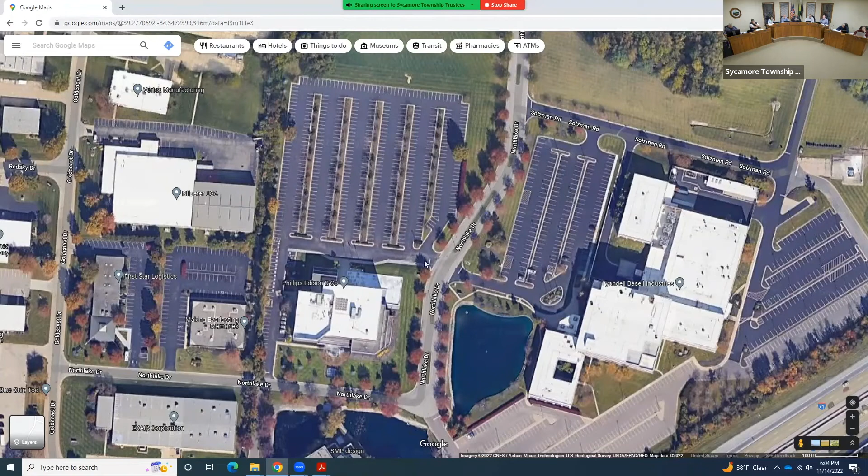The property to the north, which is the Kids First property, is zoned planned office. To the south is part of these office building sites, which is light industrial. And then to the east, we have vacant land as part of this office complex, which is also zoned light industrial. And then these properties, both March First Brewing and the properties fronting on Goldcoast, those are also light industrial.

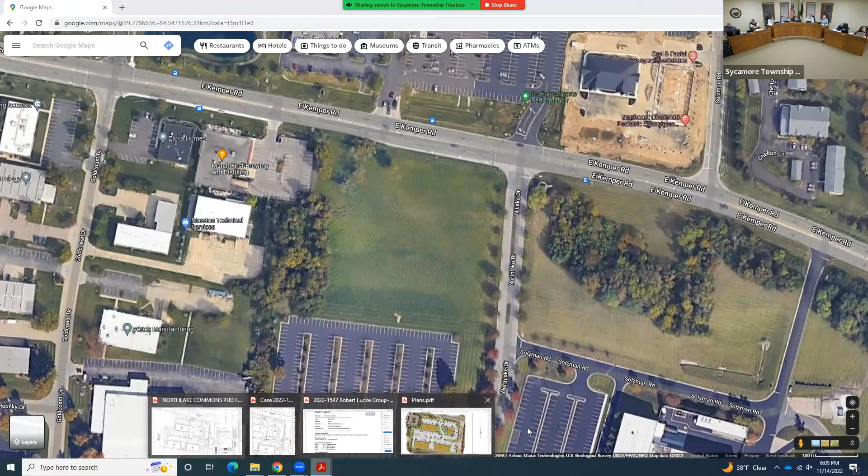The site is approximately 4.7 acres with just over 431 feet of frontage on East Kemper Road, as well as almost 321 feet of frontage along Northlake. The existing ISR is essentially 0 on this site as it's undeveloped, with a proposed ISR, I'm going to say a maximum of 68 because of the site plan changes. But the applicant is requesting this PUD 2 approval for the purposes of constructing a mixed-use development.

Building 1 is proposed as a mixed-use building with office and retail store area, totaling 11,800 square feet. The 2 buildings to the south, each also 11,800 square feet, are proposed as office, primarily medical office. And then finally, this northeastern corner of the site is being set aside for a future cafe or restaurant use with a maximum floor area of 4,400 square feet.

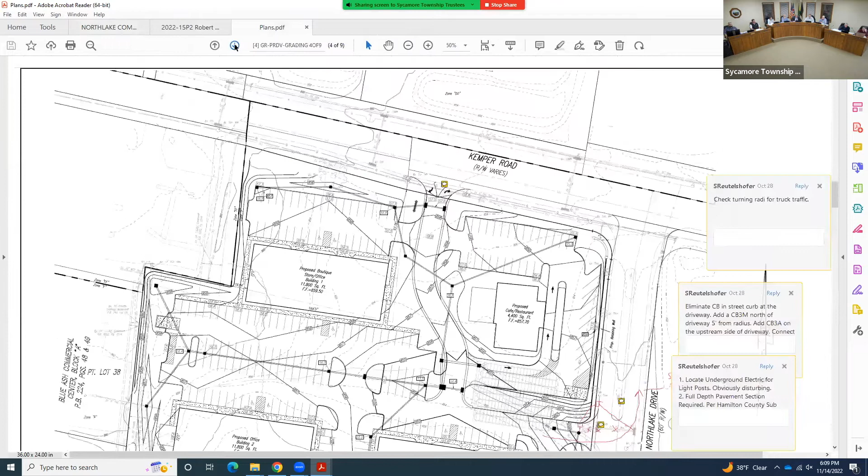Not too worried about it, but it's certainly something to take into consideration as we move forward. Most of the plans I'm going to show you tonight are going to have the original site layout, but those are the major changes. I'm going to jump around just a little bit.

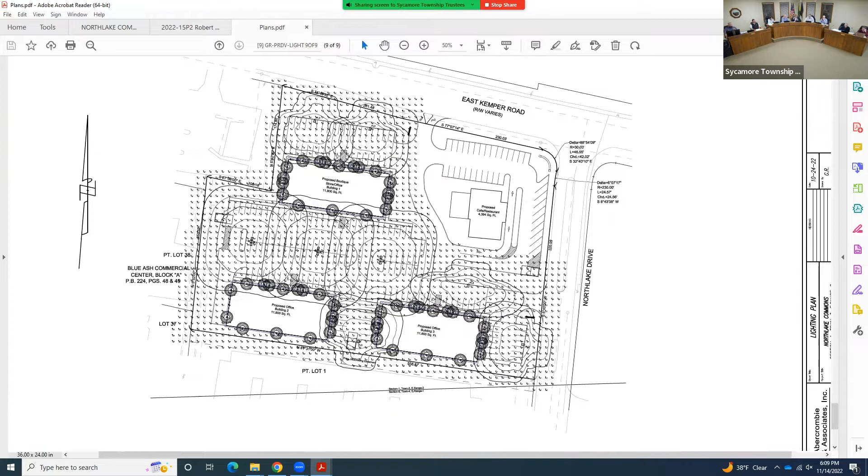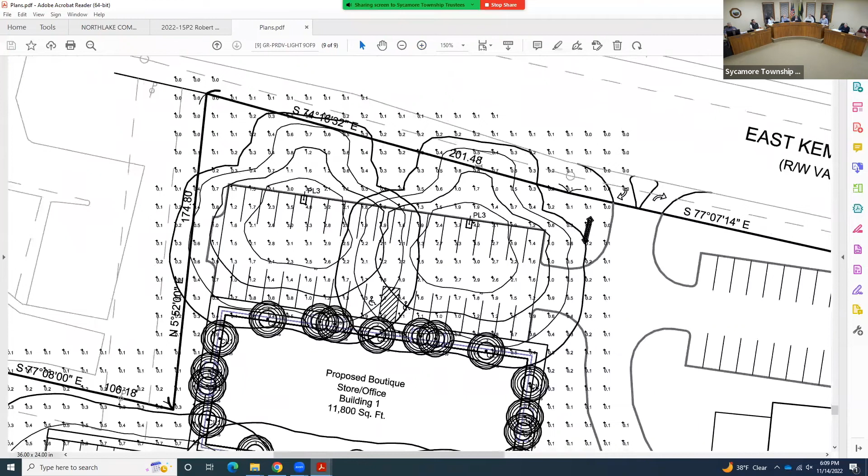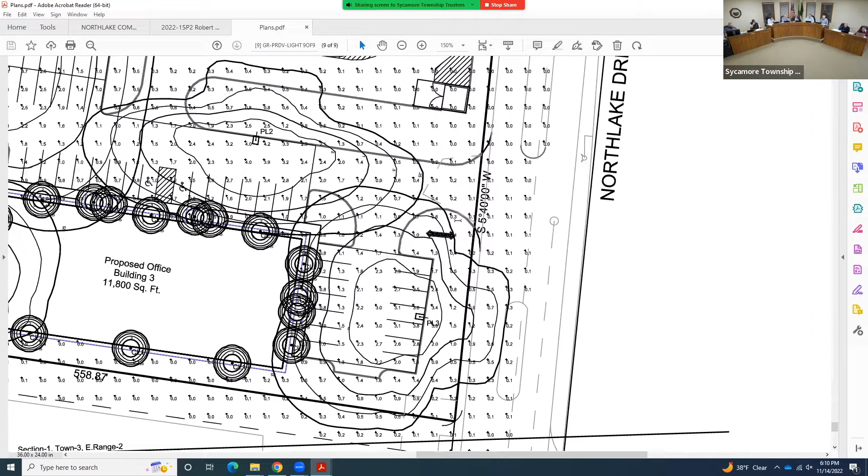Okay, photometric plan. The photometric plan was provided as a preliminary plan as part of the original review. There are a couple of what I'll call hot spots on this that do spill over the property lines in excess of our maximum of 0.5. I want to say we're looking at possibly along this northern property line - we've got a couple of hot spots, and then also here, kind of at the southeastern corner. So we'll work with the applicant to either shield these or get this redesigned, but nothing insurmountable.

Landscaping on the site is pretty good. There's actually some existing trees that I believe some of those will be retained, but good buffer to the west, and good streetscaping to the north and along Northlake.

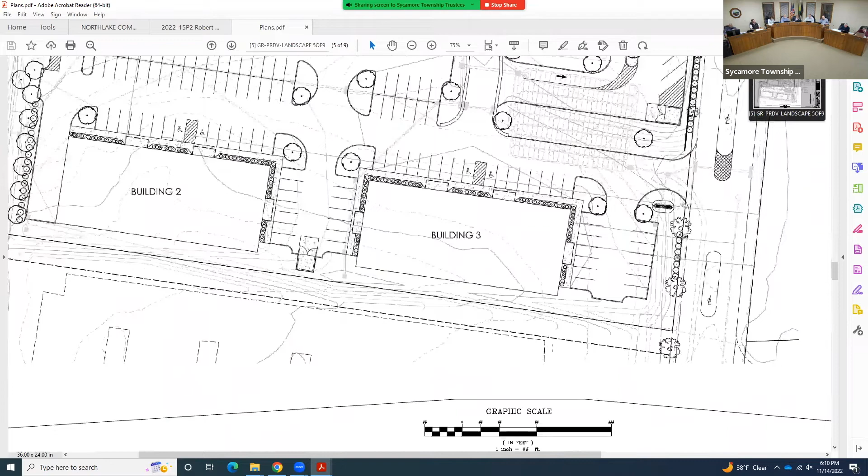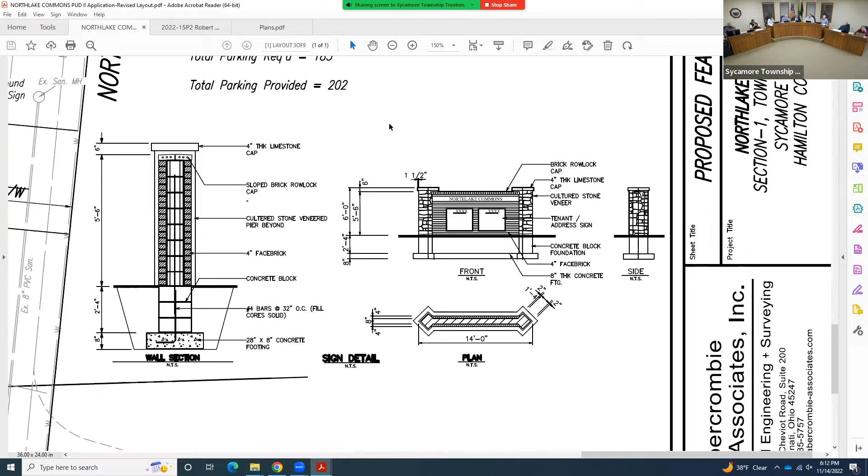The signage plan is another issue with this. This property is currently zoned light industrial, and while that's good for the variety of uses, because all of these uses are principally permitted in the F district, the F district actually has reduced signage permitted compared to even our office district. So because of the nature of this site, I'm actually recommending that as part of this PUD, in lieu of the light industrial signage provisions of chapter 13, we apply the office provisions of chapter 13. This would allow for multiple freestanding signs, one at each entrance of the site, as well as storefront or office front signage for each of the units, which would be more typical in a development of this nature. Those provisions are not part of your typical F district, so we'll just need to apply those as a condition of this.

Dumpster enclosures - there are 3 dumpster enclosures located on this site. Two of them would be fine, no issues. There is no detail on the enclosure, but so long as they meet the standard requirements of being a masonry material and having opaque wood gates, those would be fine. So we can work with the applicant on ensuring that those are approved. The final or third dumpster enclosure does not actually meet our standard setbacks. So this would be the one issue that we can work with the applicant on to either move this or get a variance for.

The restaurant pad is a conceptual layout, so provided that they meet the standard setbacks for the district, this could be reworked as part of a minor adjustment. And I think that is the plan moving forward. So I think the big focus right now for the applicant is the first phase will be these 3 buildings, with the restaurant pad being contingent upon finding the proper partner.

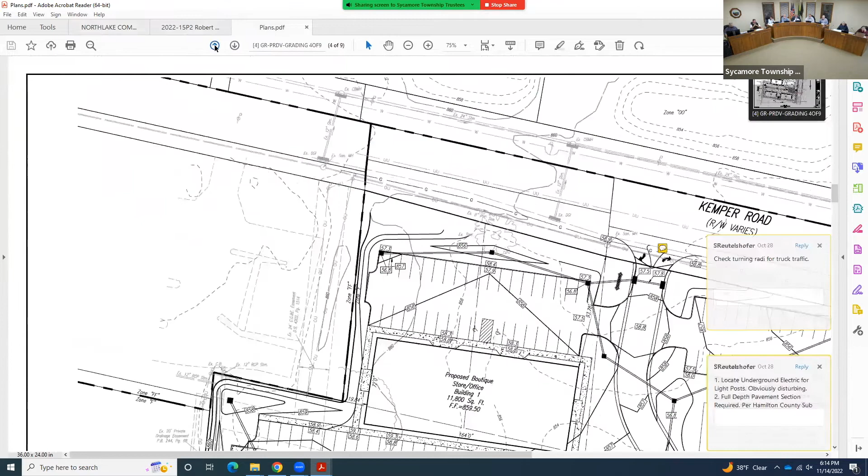As far as outside agency comments, we received standard comments from Hamilton County Engineers Office and other Hamilton County agencies. The big item is from the Sycamore Township Maintenance Department. The road superintendent has several items, but the one that would be a condition is that we would like to see the construction of a 7-foot sidewalk at the face of the curb along the frontage of East Kemper Road, with a curb ramp at Northlake Drive to cross Kemper. Sidewalk and curb ramp should follow ODOT and Hamilton County standards. Sidewalk shall be constructed through the proposed driveway.

And with that being said, staff has the following comments. Staff is generally favorable to the applicant's proposal. Should the zoning commission recommend approval to the board of trustees, staff makes the following suggestions for conditions. There is no consolidation needed here. Item number 1: site shall not be utilized for telecommunication towers in the future. 2, site shall not be used for off-site advertising signs in the future. 3, a variance shall be granted for dumpster setback as part of PUD 2 approval, if that is warranted by an actual request of the applicant, and if that's warranted by zoning commission - that's a discussion topic.

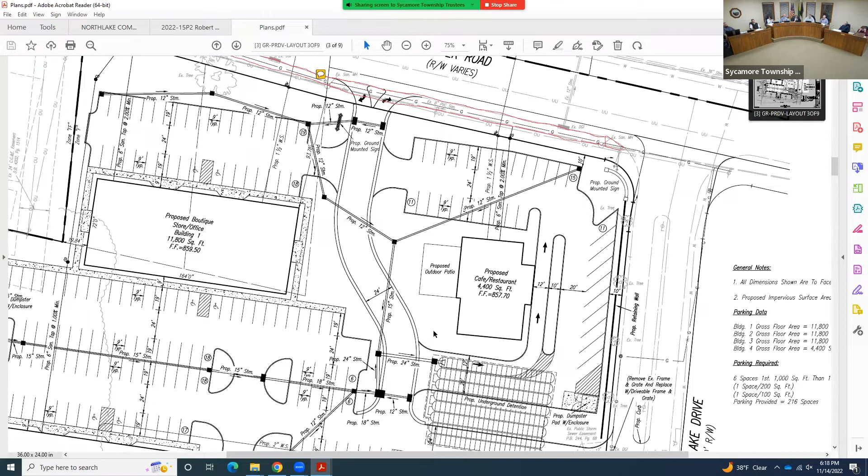And would the decrease in parking spaces help the ISR? Which is what, yeah, so I'm saying 0.68 as a maximum. Should we say 0.65 instead as a maximum? That's a point of discussion, I wouldn't suppose, but I don't think that's necessary. If the applicant can rework their site to provide additional parking, I want to give them the opportunity to do it. I would certainly set a maximum ISR and hold them to that. So I would just keep it at 0.68.

Is this part of, I couldn't pull it up on my maps at home, but is this part of our Kemper Road corridor that we're looking toward the future? Was that part of that policy? It is part of the Kemper Road corridor, which does propose office uses, ideally at a higher density, but that's not what the market's driving right now. Okay, thank you.

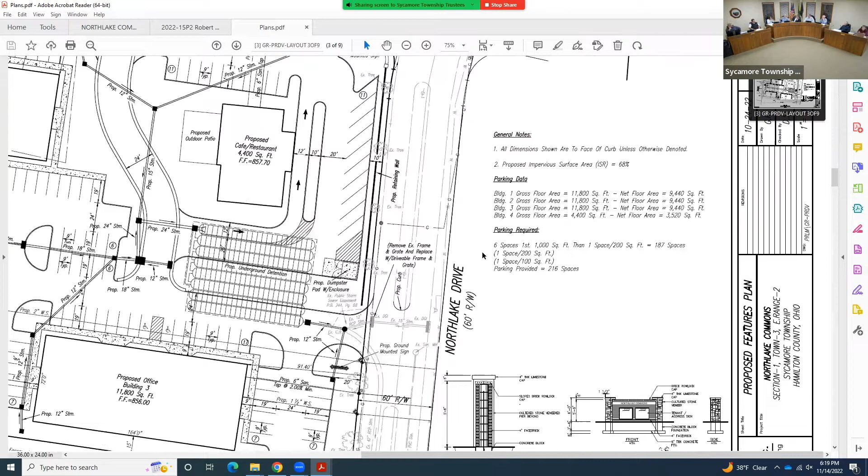That's my questions too. Go ahead, Jim. Skylar, I sent you a note earlier today regarding the drive-through and recalling some discussion with land use plans in the past, and understand that that's not in the current language. Yes, I replied to that. I did verify that is not in the policy area requirements. Okay, there's no prohibition in this area for drive-throughs. Okay, but after your response, I went back and looked at it myself again.

Within the office classification, that's not office zoning, this is office use. There was a reference to restaurants being allowable, but within an office building, not necessarily as a freestanding building like this. And that to me goes along with the intent I recall years ago on the earlier land use plans. So it's kind of carried forward as a minor usage allowed, or envisioned, in the plan, versus a freestanding building here, which I know was discussed a lot back when the plan was first evolving. So I would tend to think that clause that restaurant allowed in an office building would follow the intent of what we were after, and that generally would not include the drive-through.

But I'm open for discussion on that, but I think the point was that at the time they were looking for a lower intensity versus a drive-through, which is gonna create a lot of traffic here. I think that was not what the land use plan wanted originally and as it evolved.

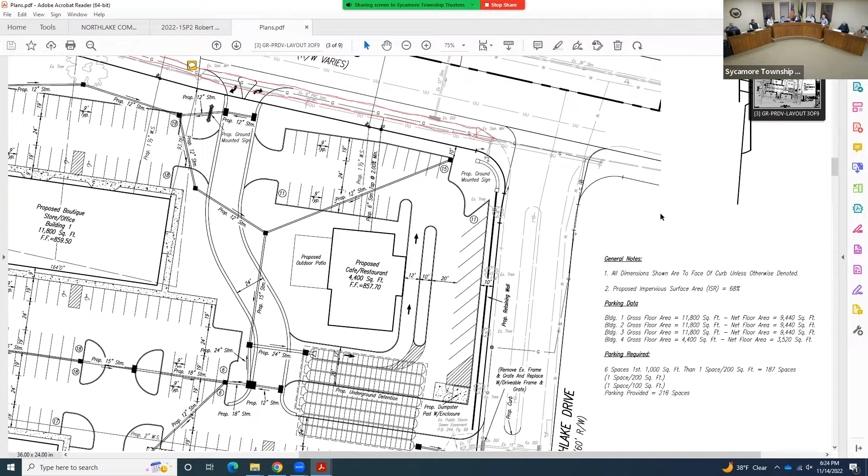Our applicant is here. There's Doug Smith from Abercrombie and Associates, as well as Mr. Scott Lucke, who will be discussing their proposal. Anyone here from the applicant, if you wish to say anything, please come up to the podium, give us your name, your affiliation, and any comments you wish to make.

Good evening, Scott Lucke, owner of the Robert Lucke Group. My address is 8825 Chapel Square Drive, Cincinnati, Ohio 45249. Want to thank Skylar for putting this together. Presentation-wise, some of the things we talked about, I'm going to come back and talk about some of the ideas that were discussed. But overall, really excited about this project.

This would be our fifth project in Sycamore Township. We've done several of these office style complexes. This one's a little bit different with the mixed use thrown into it. But one of the things, Skylar, I did not see, and I know we kind of brought it on a little late, we're still working on designs of the buildings as well.

I didn't know if you had a copy of that building design. I wanted to be able to talk about that a little bit. Yeah, I do.

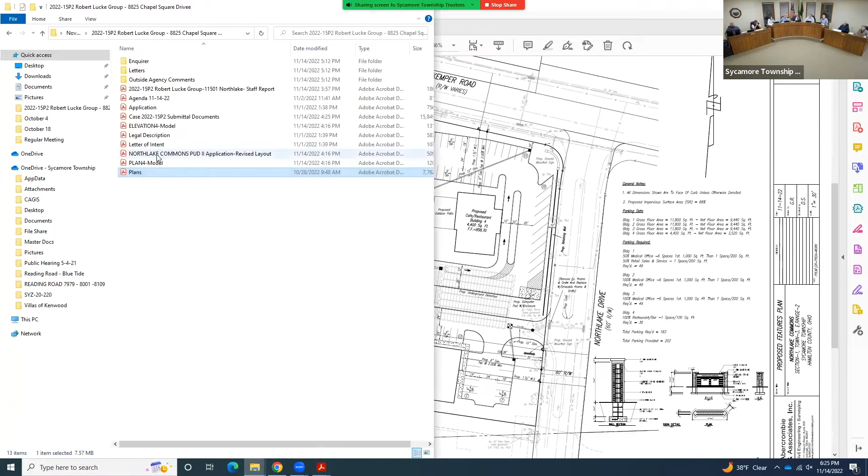I wanted to go further into our office developments. We just did two across the street in front of Kids First, very single story ranch residential style buildings. Those two obviously sold out really quickly. There's still a high demand for our office, even with COVID, and for the type of single-story office buildings. We're still seeing a lot of people downsizing into our type of product.

With this project, and the opportunity that came up to possibly develop it, there were a couple things we were looking at before we dove into just all office. A lot of things that I heard from some of the people were about amenities and the opportunity to have things in that area.

So if you look at the style of the building that Skylar has, this is building one on the site plan. It kind of gives it still our residential style office complex, looks like the buildings across the street, but with a little bit more of a retail feel. We look at this as maybe boutique stores versus office. There may be some medical users that would be a part of this building, but all the buildings would have a similar look, all three buildings.

This is outside the outlot, so ranch style, single story, potentially broken up to four users per building.

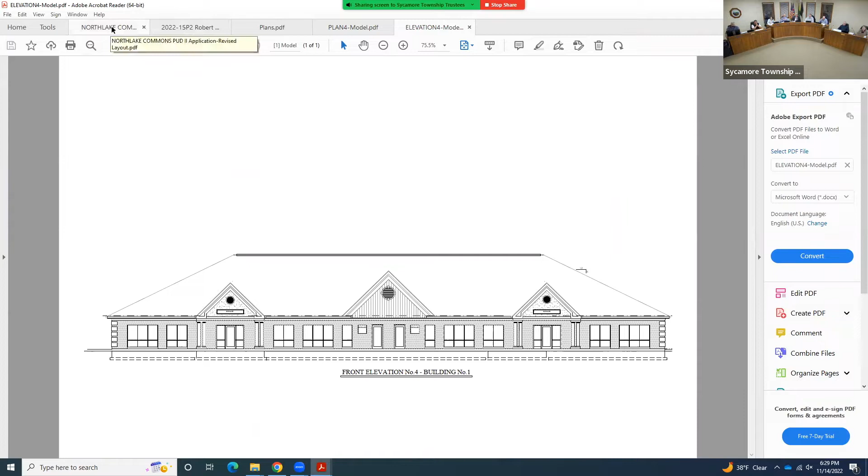Questions Skylar brought up regarding the plan: we are making some small modifications. We slid the buildings down away from Northlake, and we're trying to get the underground detention basin to an above ground one. The cost to develop today, as everyone's probably aware, is significant, and these underground detention chambers and basins are very costly. So getting it above ground might take up more impervious surface area, but at the end of the day there's a benefit both ways, and it helps make this project successful.

What else did I have—but the biggest thing is the square footage is going to stay the same. That's the one thing as we're moving things around, sliding things—we're not changing the square footage. So everything you see today is what we're asking for approval on.

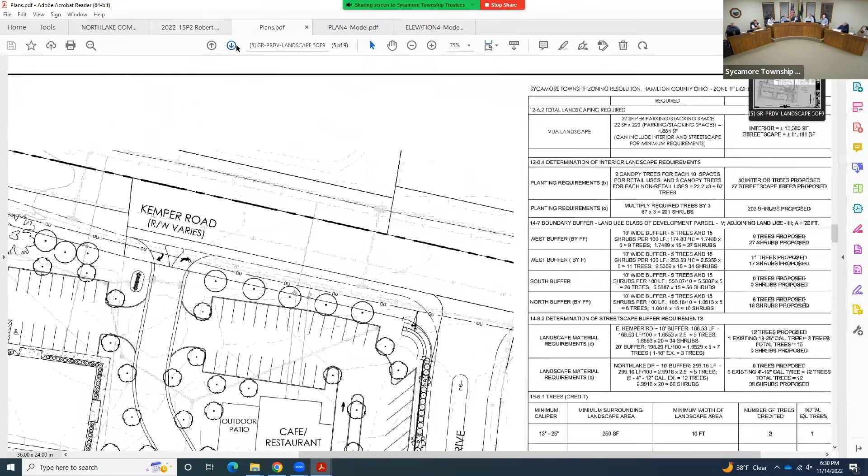The lighting plan, Skylar—just looking at it, most of the lighting I see sheds onto a little bit of Kemper Road and a little bit of Northlake. I don't have an issue if the board feels I need to get that away from the roadway. I think at the end of the day it'll be a benefit lighting up the park and making it look nice, and it's not shining on any residential property, which is usually a big concern when we put these office parks in. So if the board feels strongly I need to keep it out of Kemper and Northlake, I'm happy to do so and willing to work with you on that.

Dumpster designs—all of our dumpster designs on all of our projects are brick surround dumpsters with wood gated fences. They're similar to the buildings, so they blend in with the type of buildings and brick we're putting on these buildings, giving a nice design that blends in with what we're building as well.

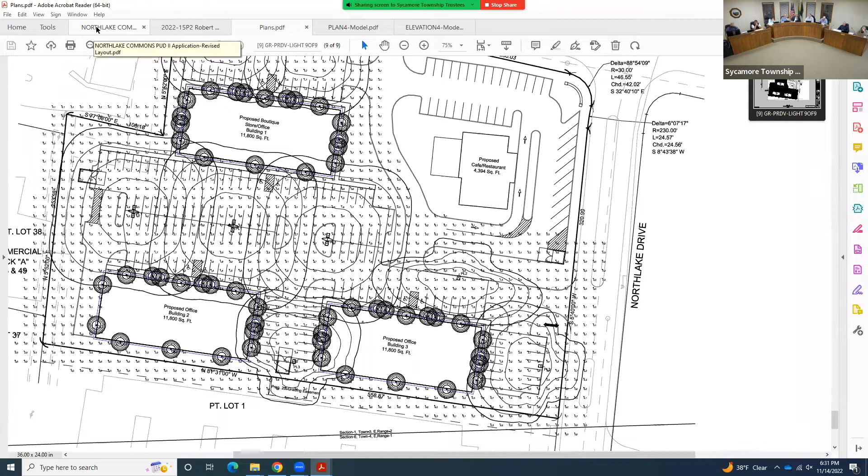On the question of the drive-through: one of the things I thought was important was to keep a drive-through available. I'm not saying a drive-through is going to happen on this site, but I noticed with COVID that the ability for people to get their food or amenities via drive-through became a very big thing for businesses. So I think it's important to have that ability, and again, I don't see it as a high traffic fast food site. But I thought it was important, thinking toward the future, to give businesses the ability to not sacrifice in case we have another pandemic like we've had in the past.

And then the other thing was the sidewalk. Skylar, you mentioned sidewalk, and that's something I'd like to work with the township on. That's about a $50,000 price tag on top of everything we're putting into the site. Again, not the township's problem, but I think it's an amenity that benefits the township, and I'm happy to work with you guys on trying to create a travel path. I don't think there's anything on the other side of Northlake, but I assume the plans are someday to try to make connectivity with everything.

We actually have, I believe, one or two million dollars in federal funding right now that's in the pipe to start connecting Kemper Road up to School Road, via Solzman, and then actually all the way down to Snyder Road.

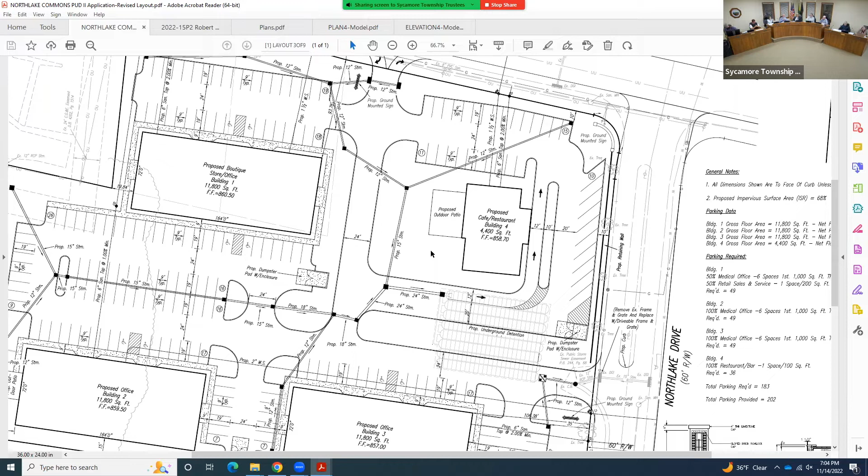Okay, this will go before the trustees, yes sir, Board of Trustees should be the first meeting in December. I'll say tentatively 6 p.m., but we'll send you official notice of that. Trustees will probably set it tomorrow night. Thank you. Yep, thank you. Thank you.

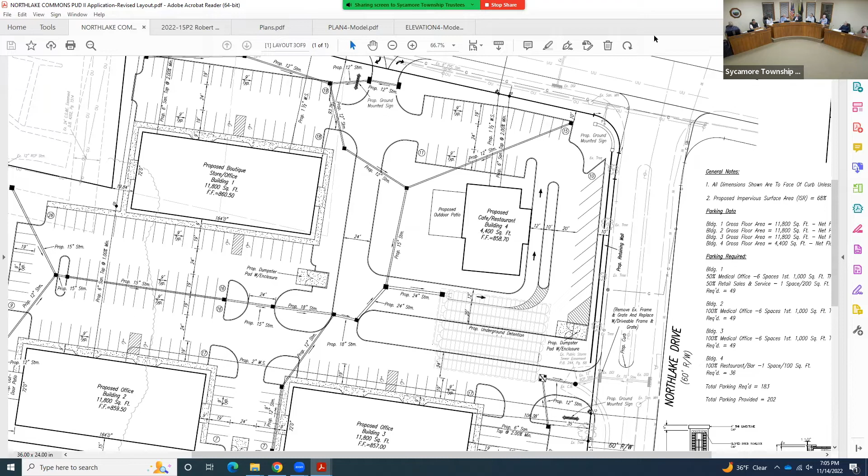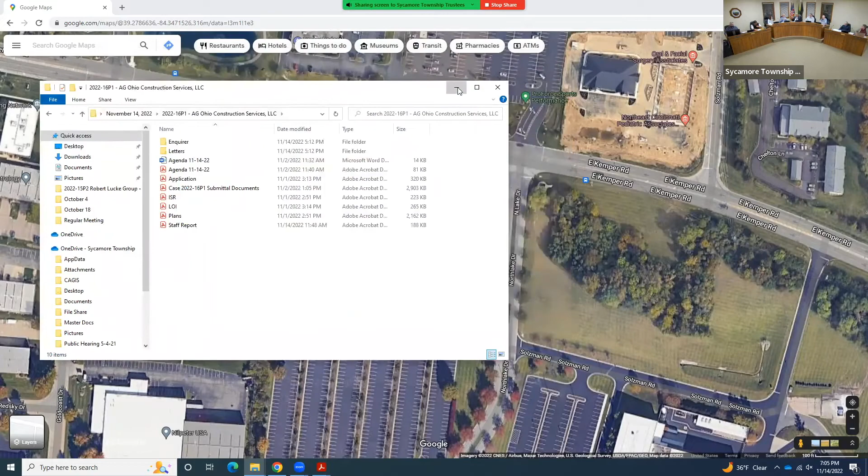So I just found that out 2 weeks ago. That's why I was surprised when I saw it. Working for a different company.

Okay, moving along. Next item on the agenda is case number 2022-16P1. The applicant is AG Ohio Construction Services. The property is 11918 First Avenue, and the request is for a PUD 1.

Yes sir, Skylar? Okay, this one is a somewhat unique proposal. I don't know if we've really looked at this type of use before. So what I have in front of you is just a quick aerial. This is 11918 First Avenue. It is currently a single-family home in the middle of the E retail district. So it's actually to the north, south, east, and west surrounded by the E retail district.

This area was rezoned several decades ago, and I think there was this vision for some type of neighborhood or transitional business that never got off the ground, and then they started building houses. So I haven't found any historical approvals for allowing that. I don't see any PUDs from the county, but these sites were subdivided and these houses were placed.

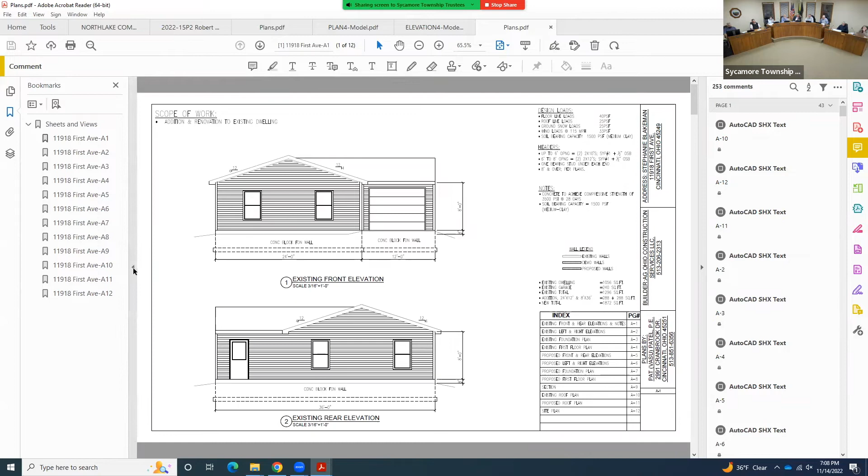Okay, so the applicant is essentially proposing to expand the home. They're looking to do an addition, which will encroach into the side yard setbacks. There's a requirement for 10 feet side yard setbacks on each side, and this house is approximately 7 feet from each side yard, so there will be a requirement for a variance to the side yard setbacks.

Additionally, the reason for this change is there's an elderly family member, that's safe to say, that will be moving in, and the addition is what I would define as an accessory apartment. Accessory apartment is a conditionally approved use for residential properties. It is still considered a single family dwelling because the accessory apartment is subordinate to the single family home, and one of the two living areas is the actual dwelling unit of the owner of the property. So it's not a multifamily, it's an accessory apartment, and those provisions are there.

So because this is e-retail, we're coming in as a PUD, because PUD single family is permissible in the e-retail district as a PUD 1, and this board is then granted the authority to both approve the variances and the conditional use. So this was essentially the easiest singular path forward for the applicant to achieve their goals on this site.

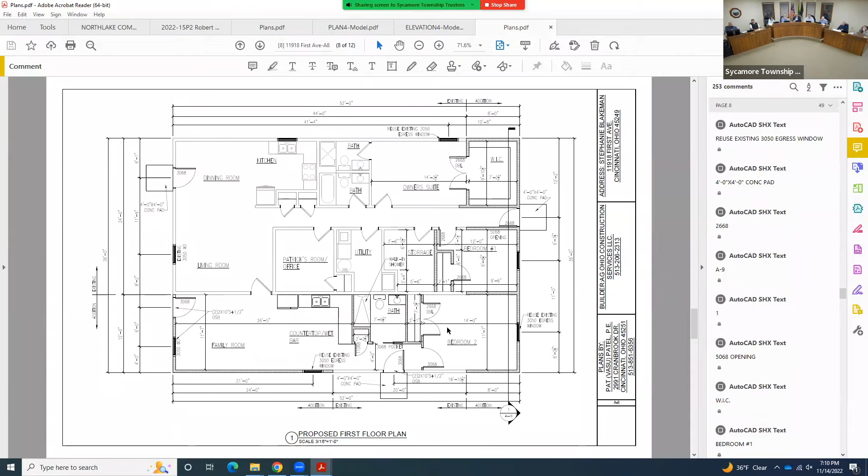So we're looking at an addition on the rear of the home, as well as the expansion on the south end of the home for the accessory apartment. There we go, so you can see the two areas of improvement on the site. This will, if approved, the applicant will continue to live in the home with the addition of their relative.

So I realize I'm kind of glazing over a lot of these issues and simplifying it for our purposes here, but this is actually a pretty straightforward case once you dig into it. Typically this is something I'd be talking about with BZA, but we're talking about this in the context of a PUD 1, so neighbors get notice on this kind of a change, just like any other development. And we've not received any calls, we've received no comments from anyone on this.

So with all that, very basic comment from the engineer's office, the internal staff and other departments reviewed it, there's no issues. Like I said, if this were in front of the BZA, the setbacks are not actually changing, it's just a continuation of the existing encroachment. Those variances are typically approved. And then the conditional use, it's a use that is approved conditionally, so as long as you check the boxes and you meet the additional conditions, then it would be permitted. If that makes sense, this applicant is in fact checking all the boxes on those.

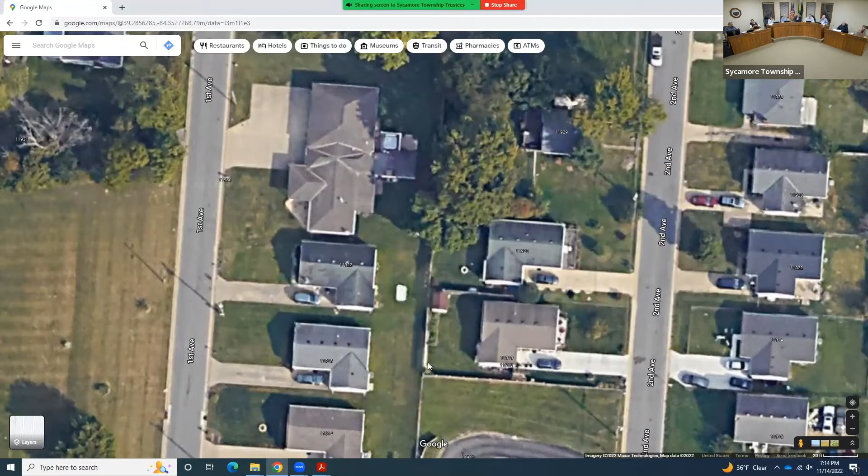And what about the rear yard? Would that even be in compliance? So C, they do actually enjoy a benefit from the E-retail district on this, where they have a 20-foot setback versus a 30, 30 would be the C setback. And what are they providing? They are providing 25 feet. So, but because it's the retail district, there's no variance required.

Any other questions? Was that building originally in compliance with the setbacks on the sides? No, couldn't have been. So as it stands right now, the house is legal non-conforming. I have no idea how it was approved. The records on this are confusing to say the least.

The original subdivision was platted in 1894 or '97, so I went back and tried to find the records on this. I did find the zone change, but it's been a while since I've looked into this. It was several decades ago, and it really seems like it never got off the ground. There are some neighborhood uses, you can see there's a convenience mart here that actually has a drive-through, and I believe further to the north there was a small gas station at one point.

Yeah, a little service station. But this first block of First Avenue and then a smaller portion of Second Avenue was actually rezoned. And then nothing substantial ever came from it. And now it's almost like the neighborhood has kind of retaken over that area.

If there's anyone here from the applicant, if you want to come up to the podium and give us your name and anything you might want to add.

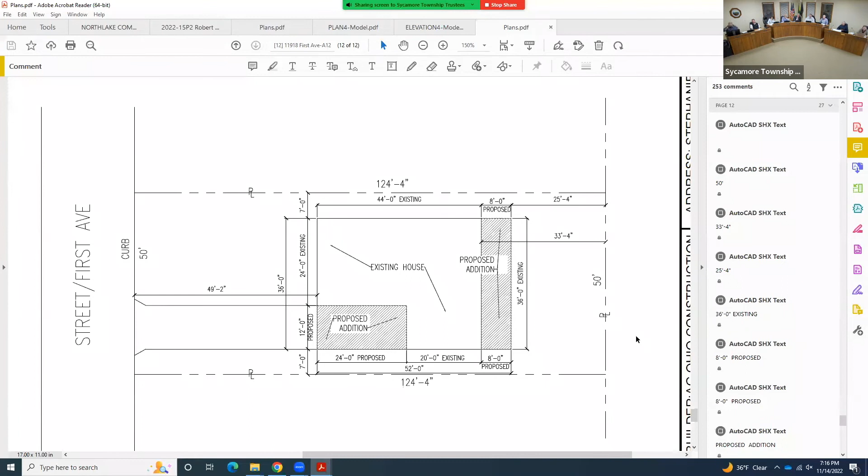Good evening, I'm Greg Manhart with AG Ohio Construction Services. Thank you very much for having Stephanie Blakeman, who is the homeowner, with you tonight. My address is 4457 Bethany Road, Mason, Ohio, 45040. And also I'd like to thank Angie and Skylar for walking us through this situation, because it's been quite an experience at that. So with that, do you have any questions of me before I continue?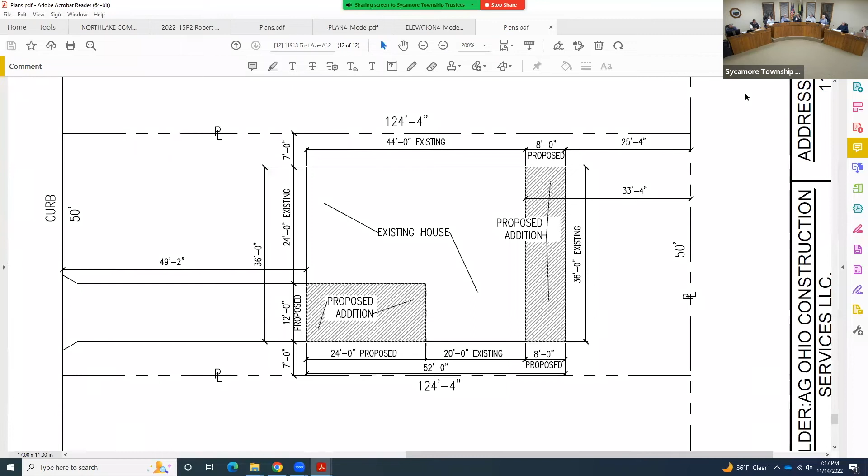Anyone? Mr. Roos? Again, nope. It's that Stephanie's father passed away some years ago, and now her mom wants to move closer to her and her brother. So that's the reason for the expansion on the house, and she's wanting to get it done as soon as possible. So any help from you would be greatly appreciated. Okay, thanks sir, appreciate it.

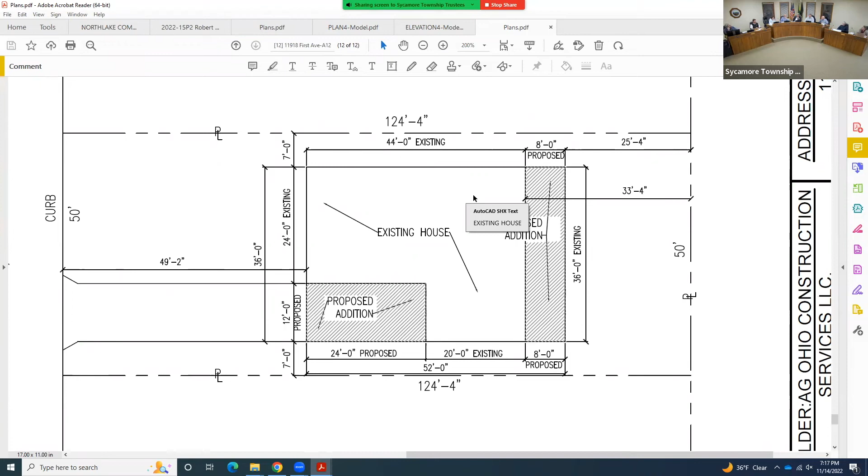Okay, any further comments? Looks like a nice design to me. With everybody, people getting older and needing to find locations to live, I can understand the need for this.

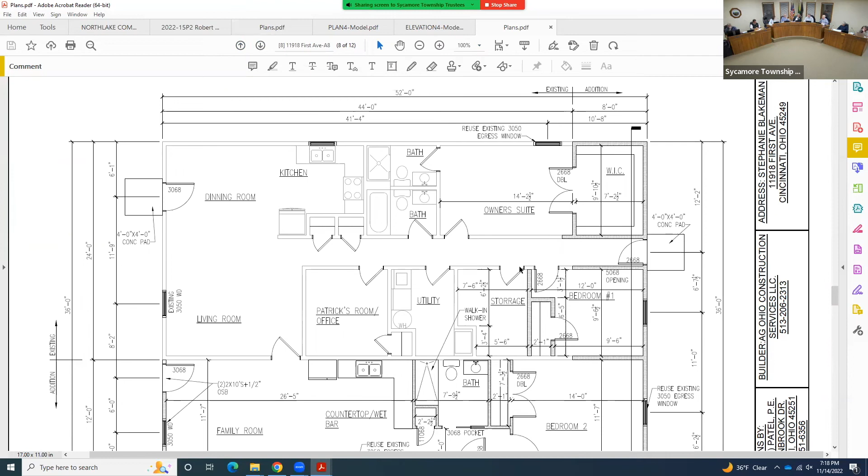Steve, when you read your motion, did you include the two conditions? Oh yeah, I should have done that. Go ahead. I will amend the original motion to include the staff comments for the two additional conditions. I'll second it, please. Okay, alright.

Sure. Ms. Flanagan, aye. Mr. Barrett, aye. Mr. Friedman, yes. Mr. Roos, yes. I'll vote yes as well. Okay, thank you, thank you very much. Certainly.

Thanks for jumping through all these hoops with us, guys.

Okay, but we've actually worked with this contractor, the property owner, for a number of months, because when they came to us with this project, it was really a head scratcher. It's like, okay, how do we get everything done? We tried to do it administratively for them, and there was no path forward that really made sense. On top of that, this lot actually had two parcels in the rear that were part of a vacated alleyway that was counting towards this whole lot, and one of those pieces was not conveyed as part of the rest of the house. It still had the old owner's name on it. And I'm like, well, before you come into zoning commission or anywhere else, we got to get this cleaned up. So they actually found the old owner, who was in a different state, and got that consolidated with the rest of the lot. So it's a nice clean package for you guys tonight, but Angie worked with them for hours and hours, days and days, and finally we got something that kind of made sense to get in front of you guys. So thank you for that.